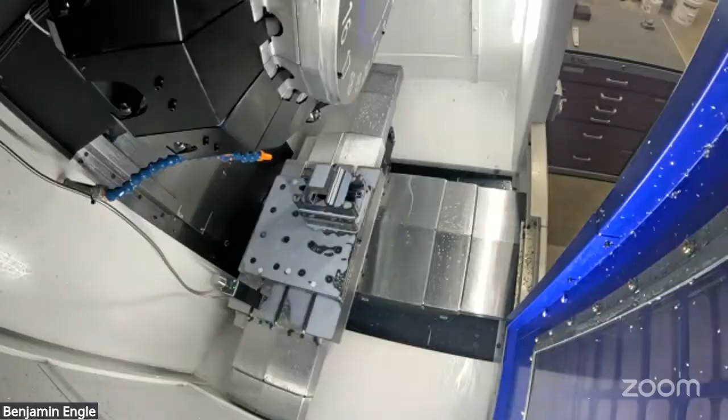Just a heads up, we might need people to turn off their webcams when we go to the live stream when we're showing the machining. Turn them off and then can they hide themselves? Switch to the guys, we're live on YouTube, but switch to the machining one. I just want to see what appears on YouTube versus Zoom. There's going to be a bit of a lag. And then I can highlight myself for everybody. Make sure you guys are all in gallery view.

The thing I'm trying to check now is what does the YouTube stream look like? Yeah, it worked fine. When you showed the machine, that was the only thing on the video on YouTube, and when you showed your screen, that was it. When I look at the webinar view, Ben, I don't see my screen at all, even though I'm screen sharing. I see your screen. That's interesting. So you see my screen, do you see Fusion?

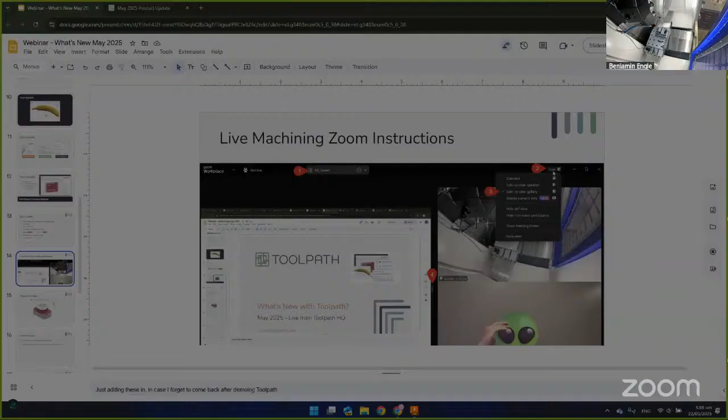It should look something like this. Yeah, I see that. You need to be in gallery mode. I am in gallery mode, and all I can see is everyone's video streams, not my screen share. You have to click number one. Make sure you're on my screen, not webinar. Okay, so I can only see a small machining video. This is just what I see, which isn't great. That's fine. That's better than nothing.

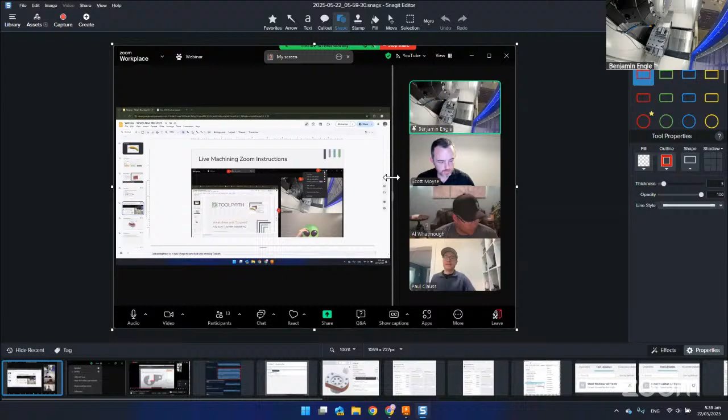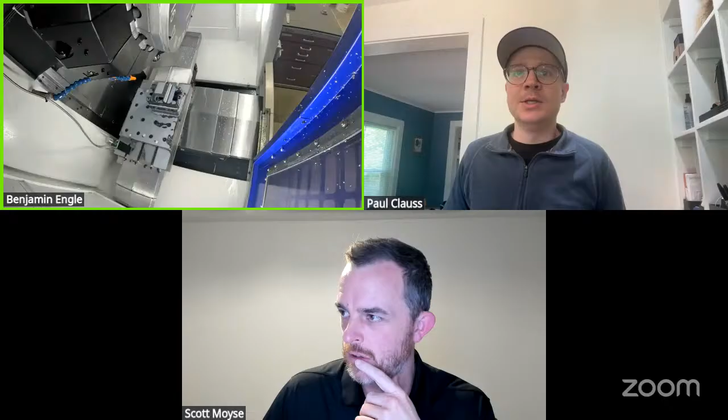It's because Paul and Al are on the call now with their videos. So if you guys kill your videos... Well, their faces are still there. You have to hide. They really just shouldn't be on the panel. Scott, stop sharing your screen for just a sec. Okay, so that shows me Ben's pinned video of the machine. If you share your screen again, I think it should take priority. Yeah, it goes to yours. But we were trying to get an even split either side of the divider between machining and the screen.

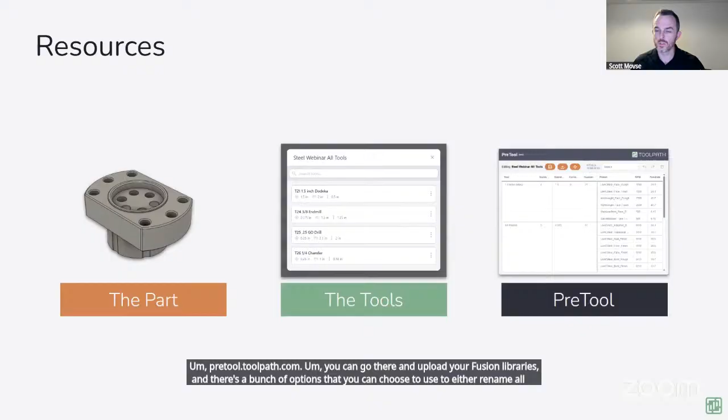Pretool.toolpath.com. You can go there and upload your Fusion libraries. There's a bunch of options that you can choose to use to either rename all of your tools to a consistent standard across the board. Even if you only do that, it's really handy. But where it gets really powerful is if you go through and add all of the Toolpath standard preset names, and again, optionally, you can add feeds and our suggested feeds and speeds to those presets.

It's an absolute joy when you start using Fusion with all of these presets configured. You just don't have to think about speeds and feeds anywhere near as much. Those kind of decisions just disappear, and it just becomes far less stressful programming in Fusion. Really powerful stuff, make sure you check it out. And again, there's some good learning content on our knowledge base to teach you how to use Pretool.

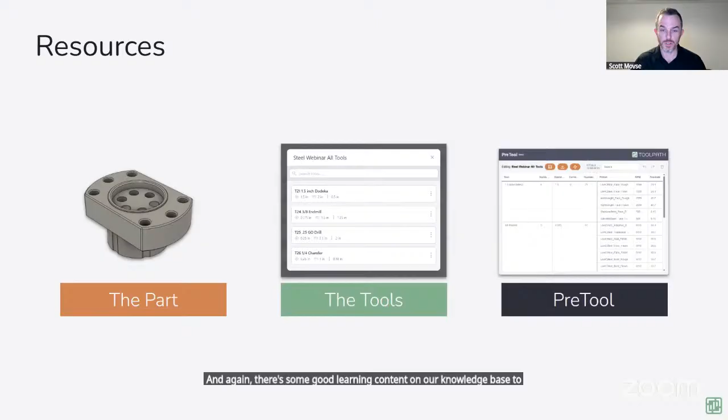So this is pretty cool. Today we've got Ben in our machine shop up in Bedford, Ohio, near Cleveland, and myself down here in Christchurch. So technology at its best. Fortunately, we've got some good fiber connections between the two continents, and here we are.

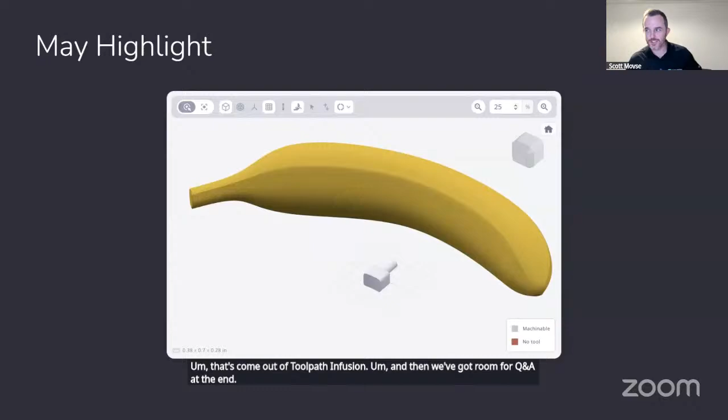All right, so the first highlight is Banana for Scale. This kind of speaks to how awesome our team is. I put a comment in Slack in sort of mid-March joking about including Banana for Scale, and one of the developers came back and said, sure, just give me a model. So I modeled this banana up using T-splines in Fusion, and the idea was for it to just be a one-hit wonder for April Fools, but it was very popular.

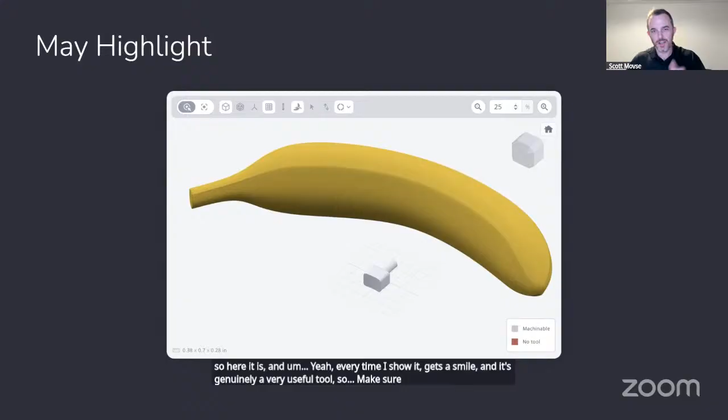Users asked us to put it in the product permanently, so here it is. And every time I show it, it gets a smile, and it's genuinely a very useful tool. So make sure, we've got a cute little banana icon up on the toolbar for you to turn it on and off.

The real highlight for me is our tool recommendation engine. This is an absolute game changer. The idea that you now don't have to rummage through tooling catalogs anywhere near as much as you needed to in the past is just absolutely incredible.

We've now got magic uploads as well. So when you upload a tool library to Toolpath, if the Toolpath cutting presets aren't on any of the tools, it'll add them by default. So when you then use that tool library in your cut config, it'll propagate all of the cutting roles automatically with those presets. It doesn't change any of your existing data, just adds more to it, mostly to create the right experience for new users.

Now, the most frequented area, I would imagine, is the overview tab in all of the part reports. So we've just organized everything on the right-hand side a bit more. We've now got tool recommendations in there as well, just a bit more data at the top in the overview section. And then all the machinability messaging has been improved, all the grouping there as well. And then you can click on each of those issues and get some deeper insights and learn about why that particular feature is not machinable at the moment.

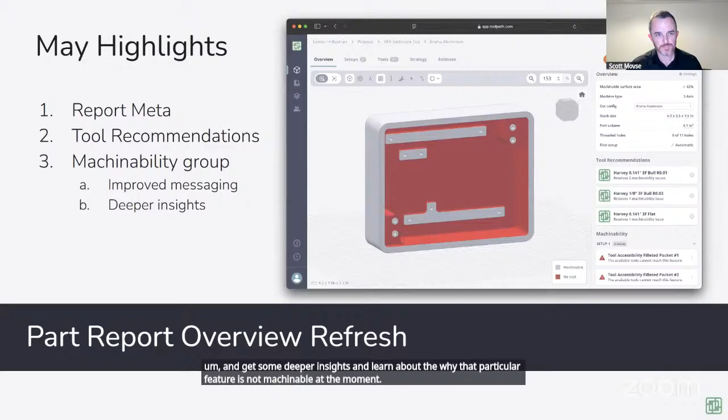Then we've got some quality of life updates. Tool compaction is now called tooling capacity. This used to be, I believe, in the user preferences, but now it's part of the cut config itself.

Now when you're editing a cut config or creating one, once you've saved it, you can set it as default right there in the canvas, instead of having to go back to the main cut configs list and choose which cut config you want to set as default.

In the cutting roles view of the cut config, we never used to show which presets weren't assigned yet. Now we've got a little unassigned tag that shows up, so if you miss one, you know, and you can drag it across into the cutting roles area.

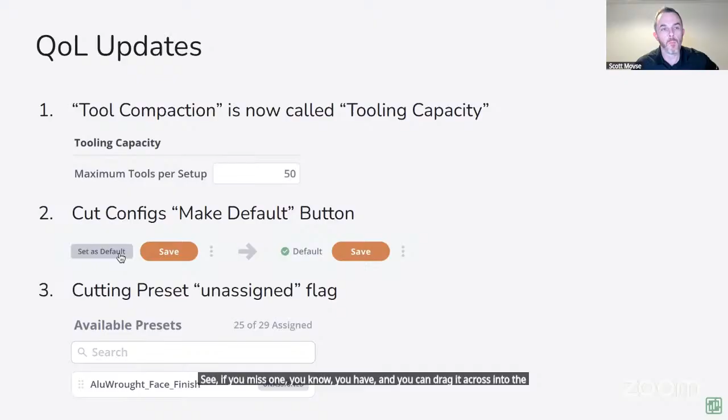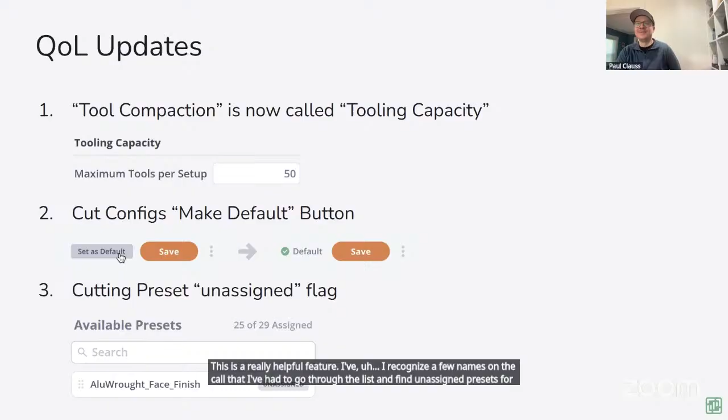This is a really helpful feature. I recognize a few names on the call that I've had to go through the list and find unassigned presets for before. So, nice.

All right, so today's demo. I'll just switch into Toolpath here. I've uploaded some parts already, but I'll grab one just so you can see the normal process. So, uploading that part, using the default cut config to generate.

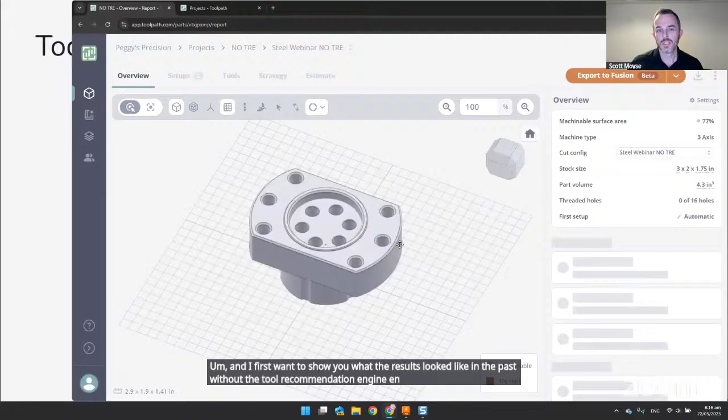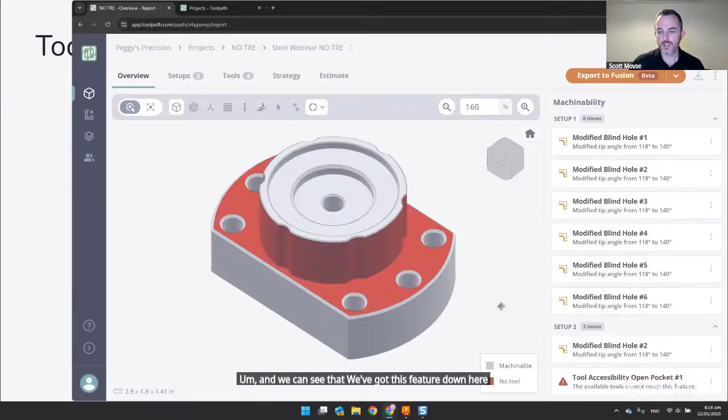I first want to show you what the results looked like in the past without the tool recommendation engine enabled. In the overview tab, we've got this part we're working on today, and it's 77% machinable on a 3-axis machine with a cut config that doesn't have tool recommendation engine enabled. We can see this feature down here, this open pocket, isn't machinable because there's no available tools to reach it.

So in the past, we'd have to inspect that, figure out what size tool we need, go find that tool, and make sure it's added to our library so this would then become 100%.

But if we go to our tool recommendation engine result, we can see we're now using a different cut config where it's enabled, and we've been recommended this quarter-inch Kennametal flat end mill, which is going to solve both finishing and roughing for Open Pocket 1.

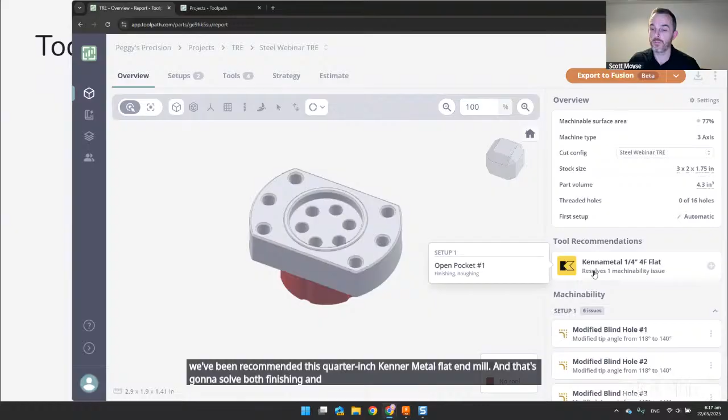We can click on this tool, click on that entry twice, and get displayed information about it. Now we include the product ID, and we've got a link out as well, so you can go to the Kennametal website or whichever vendor it's from and see information about the tool on their website, in their context.

Buy it if you like, and if you do want to move forward with using that tool, then you just click use this tool.

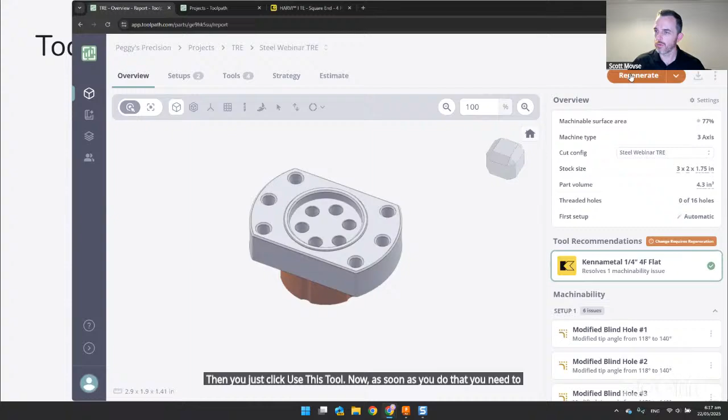Now, as soon as you do that, you need to regenerate. But before I click regenerate, I'm just going to go and have a look at the rest of this part and see what else might need to be done.

So we've got two setups here. In the setup tab, for each setup, we've got a summary of all the features on this part. In setup 1, we can see there's some holes. We've got a 1.4 inch hole, which is just the big bore at the top, and then the quarter-inch holes are all the ones around this PCD in the middle here.

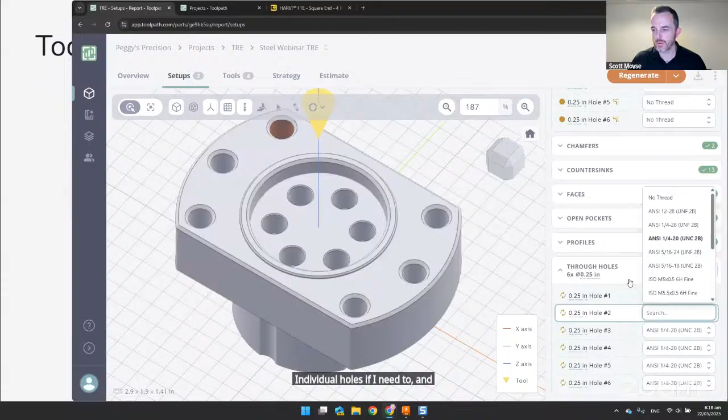And then down the bottom we've got another 6 holes. These ones around the outside are actually threaded, so I can come in here and choose my 1/4-20 thread, and when I do that, it will apply that to all the holes. I can optionally come in and deselect individual holes if I need to, and make them just through holes if that's what's required.

And once I've done that, even if I hadn't selected the recommended tool, I would again have to regenerate. So now I've done both of those things, I'm going to regenerate again. That's going to add this tool into the game, and then analyze what's required to manufacture those 6 holes.

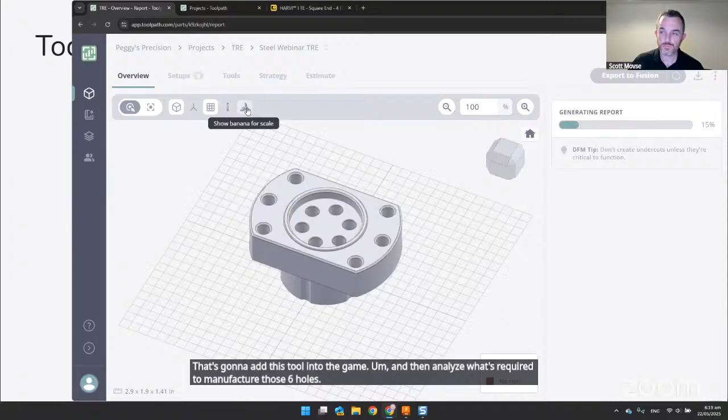So while I'm waiting for that to generate, I'll jump into the tool libraries here and show you that. Now we've got a selection of vendor libraries in here already - we've got some Kennametal, Harvey, and Haas, and then we've got generic Toolpath libraries. So pretty comprehensive libraries for hole making in here.

We're going to add more and more to this over time. Then if we have a look at the cut config, and go to the no tool recommendation cut config, we can see how we enable tool recommendations in Toolpath.

So we've got the new overview tab here, where we're starting to aggregate different assets from around Toolpath, and this will keep growing over time. We've got our general machining preferences in here, which set up the guardrails for how you want the AI to program your parts.

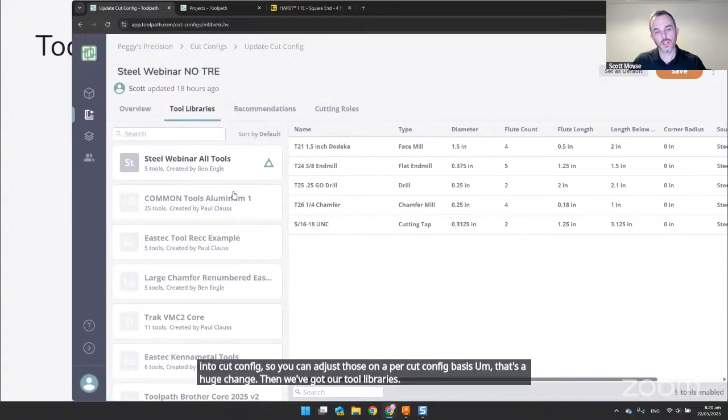Geometry deviations were in user preferences before. They've now been put into cut config, so you can adjust those on a per cut config basis - that's a huge change. Then we've got our tool libraries, which are typically the tool libraries for tools you have available in your shop.

Recommendations, this is more for the vendor libraries. This is where you would select the libraries for your tool recommendation engine and then cutting roles. In your tool libraries, you've got the option to set whether this particular library is preferred, standard, or backup. So that's super important, and you'll see why later on.

And currently we can see we've got 5 tools in our machine effectively. So these are the 5 standard tools we've always got in our machine.

If we go to our recommendations tab now, we can look at adding some of these vendor libraries. So we've got the 4 flute library from Kennametal, and we want to add some drills. So we can add in a stub and jobber drills library, and then also taps.

So what will happen now is when Toolpath plays the game with your part, it's going to prioritize using tools from this library, and if it can't find what it needs, then it's going to pull everything from here.

In the cutting roles tab, this is where you can see where all of the cutting presets from each individual tool is propagated, like as a group, automatically using the autofill presets button down here into all the individual cutting roles.

So if we get rid of alu face rough, we'll then see here that it's now unassigned, and we can drag that in and add it back if we want. So I'm not going to save that, but you would have to save it to make all those changes stick, and then regenerate your report, and it will then use the tool recommendation engine.

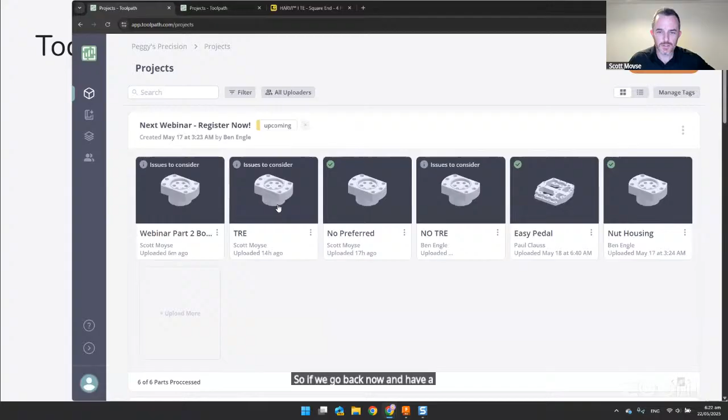So if we go back now and have a look at TRE, we can see it's now giving us a new recommendation. Now this is super cool - not only has it pulled through a tap, it's pulled through the matching drill to go with that tap.

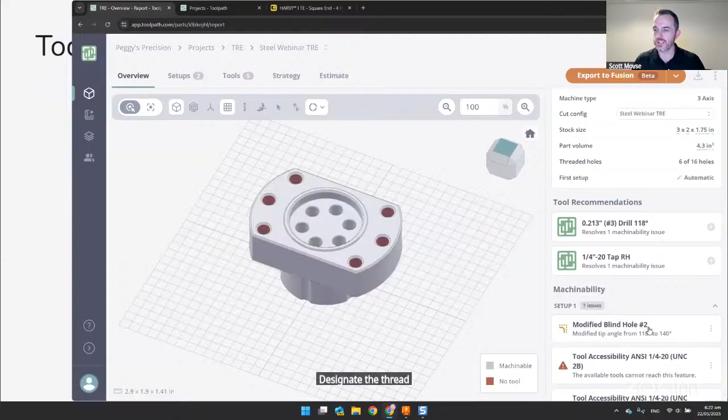So you don't have to spend time thinking about which drill's needed for that thread. You just designate the thread, Toolpath finds the tool that's needed and adds it in. So yeah, I want to accept both of those, and it's going to solve all of these tool accessibility issues for these holes here. So add both of those and regenerate.

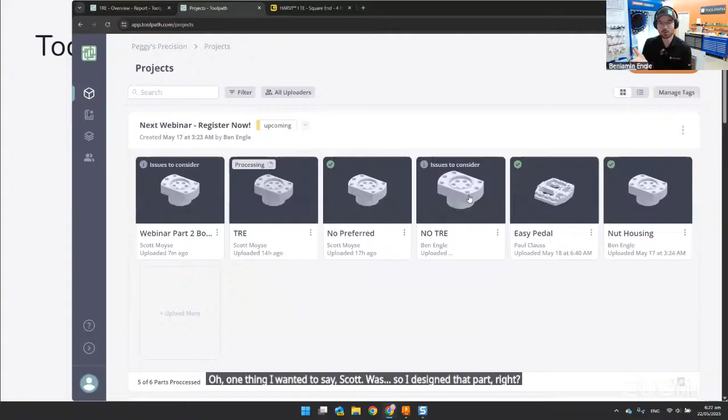Oh, one thing I wanted to say, Scott, was so I designed that part, right? And those have 1/4-inch holes. I'm just a bad designer. And you threw some 1/4-inch, like quarter 20, which I'm surprised you didn't use metric.

It really surprised me. But what it's doing is it's ignoring the actual geometry, and you're saying, hey, I'm overriding this - Toolpath, I want to make these quarter 20 holes. So you need to be smart enough to use the drill size. That's pretty slick. I think it's nice that you can override that.

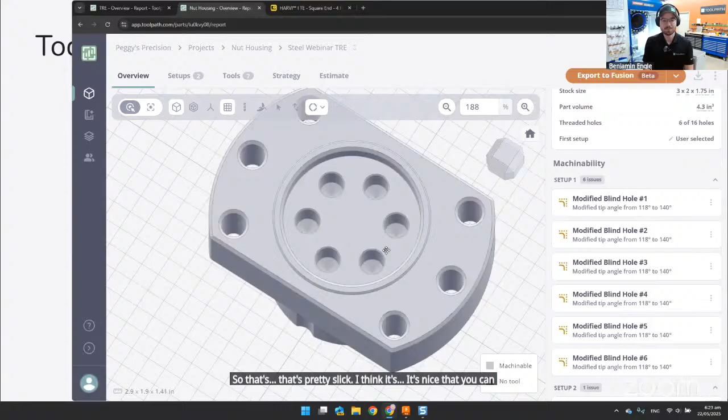That's right. So if we have a look at the tools tab here, we can see that our library had a 1/4-inch drill, but obviously it can't use a 1/4-inch drill on a 1/4-inch hole if we're going to put a 1/4-inch thread through it. So that's why we've now got this number 3 drill added into the list. All right, back to the overview tab here.

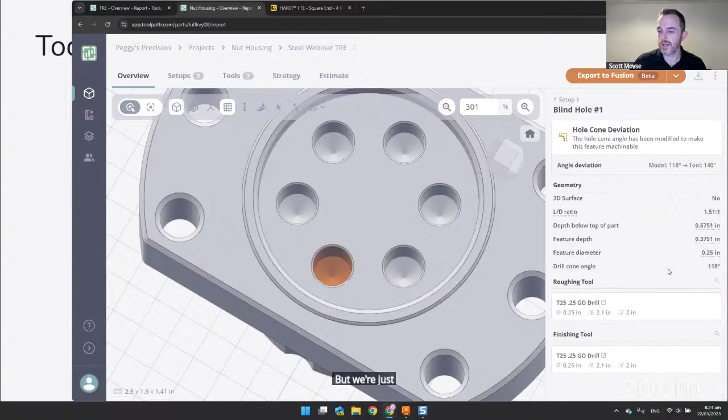I just want to point out there's still some machinability notifications here. Not so much issues, but a notification that something has been changed. We've made some assumptions here. So we've got hole cone deviation. So it's modeled at 118 degrees, but our Go drill has got a 140-degree tip angle on it, which is fine. So we can still drill that hole, but we're just letting you know that change has been made. So if we go back to setup 1, we can see that there's a number of those modifications across 2 setups.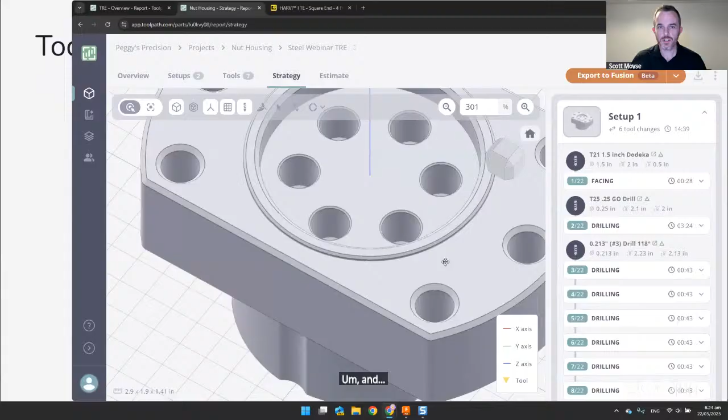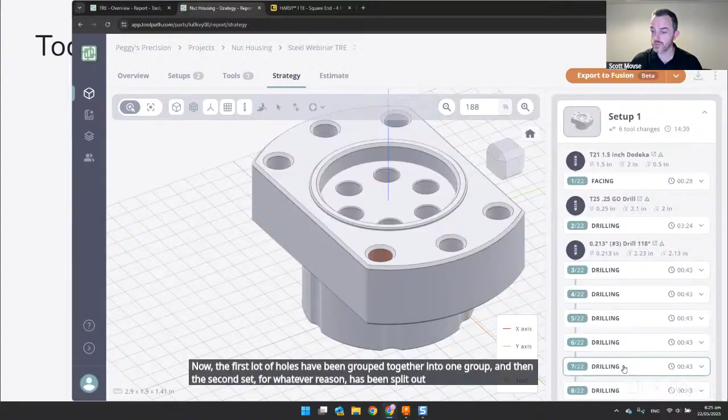All right, so if we go to our tool list, we can see that we've now got our 7 tools in here. And strategy, we can review this. So we've got setup 1 and setup 2 down the bottom. So we've got 12 operations in setup 2 and 22 in setup 1. Now the first lot of holes have been grouped together into one group, and then the second set, for whatever reason, has been split out into 6 individual drilling operations, and then we've got 6 individual tapping operations. Yeah, that's something for us to improve, but it's done the job.

We've got the chamfering split into 2 separate groups, and we'll explore why that is when we look at this in Fusion later on. So you can expand out all of these and see all the speeds and feeds that have been used as part of the preset on that particular operation. Then, of course, we've got the estimate tab. But I'm going to go ahead and export out to Fusion. I didn't actually need to do that. And go import program, put in my key.

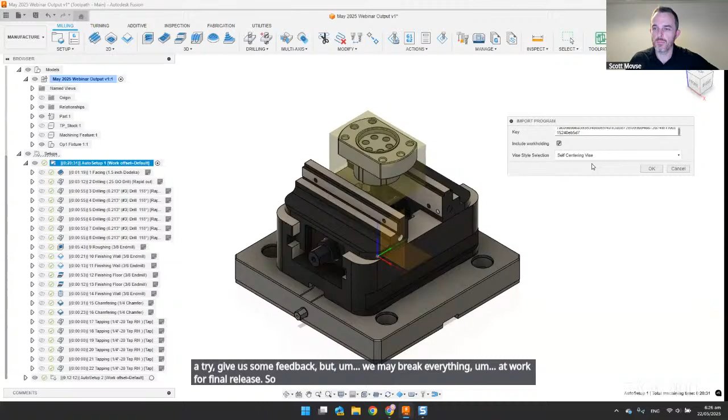Now we've got this include work holding checkbox. If anyone's interested in trying this, I've been asked, we're happy to tell you how to turn it on, but it is kind of alpha. So we haven't fully defined how we're going to build out all of this work holding yet. So you're more than welcome to give it a try, give us some feedback, but we may break everything for final release. So here I want to use self-centering vice and click OK, and everything will load up.

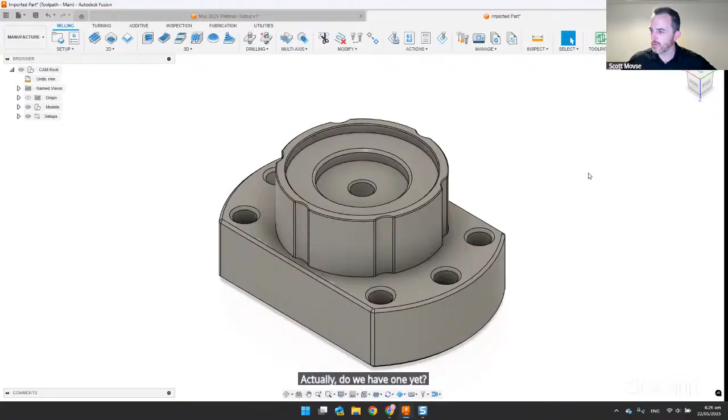So it's going to go and pull out the work holding from our team hub. You can then replace that vice with your own. We've got tutorials to show how to do that. Actually, do we have one yet? Or are we going to create one, Paul? We have some stuff, and I'll create one. I asked people in the chat, if you want to try out work holding, shoot the support email, and I'll create a video and get people set up.

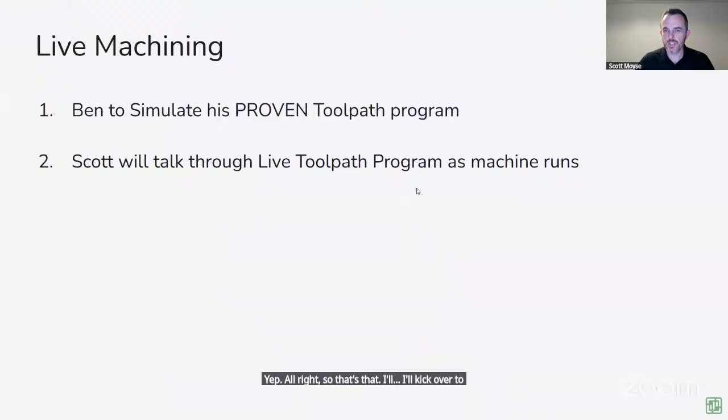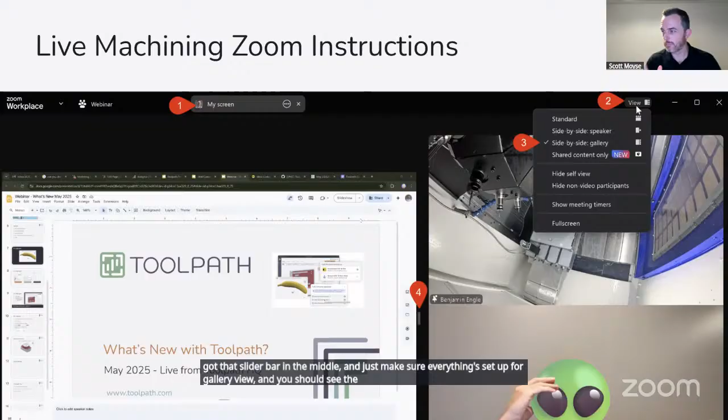Right, so that's that. I'll kick over to Ben now, and he's going to show you what he's running on the machine and get the machine running. But yeah, just as a reminder, you've got that slider bar in the middle, and just make sure everything's set up for gallery view, and you should see the machining and Ben's screen at the same time. Cool. Thanks, Scott. That was excellent, by the way. I'm going to share my screen.

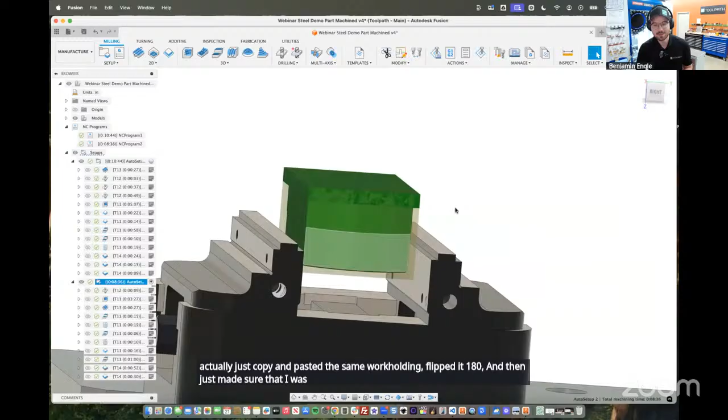So I've got the same part. We've already machined it right here. And Scott's going to go over some of the things that we ran into when we pulled in for the cam automation. But overall, it did an excellent job. So I'm going to show you, this is setup 1. Toolpath pulled this in all automatically, but for setup 2, I actually just copy and pasted the same work holding, flipped it 180, and then just made sure that I was holding it between parallels. So I've got a little bit of work into the second setup, but we just want to be completely honest with you guys and show you that it's not just press go on the machine.

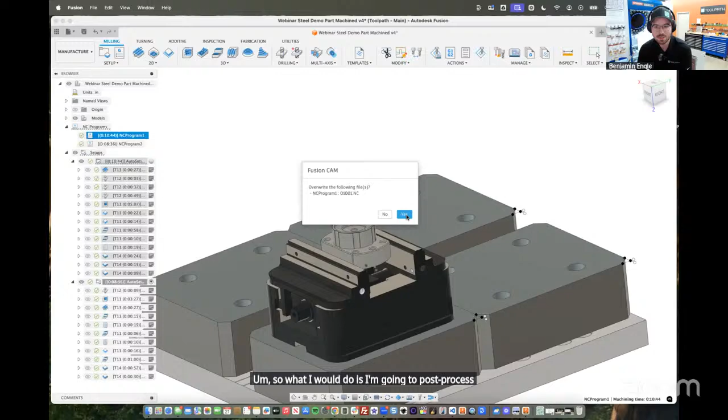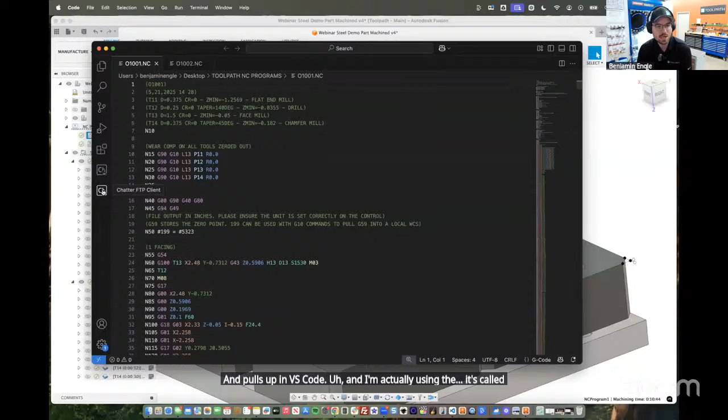So what I would do is I'm going to post-process this op1, and it pulls up in VS Code. And I'm actually using what's called the Chatter FTP client. So if I open this up, I can see my program number there, and it's being sent out to the Brother Speedio. I'm going to overwrite it, and the FTP transfer has happened. So now it's gone straight to the Brother. So what I'm going to do now, I'm going to kill my share.

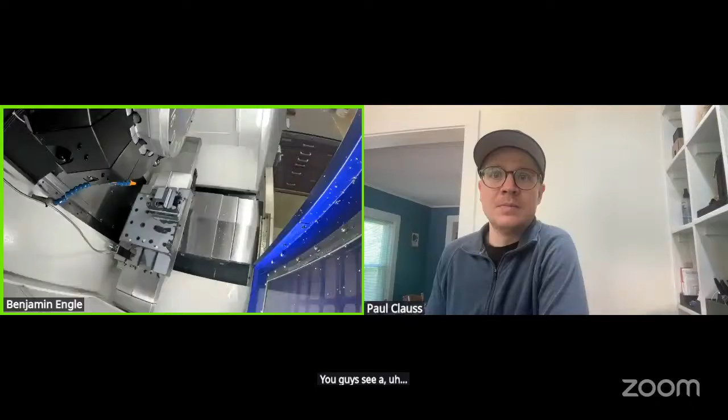Just bear with me while I set this up. You guys see a Brother. Let's see here, spotlight for everybody. And we'll do, okay, cool. All right, so I've got my stock set up. Can everybody see me? Good, right? I can see you and hear you.

Okay, awesome. So we're making this out of 1018 steel. And so I have my stock set up for my op1. I'm using a hard stop, so I've already probed it in, so I don't have to worry about that. And we'll rock and roll and press cycle start. I have it pulled up here.

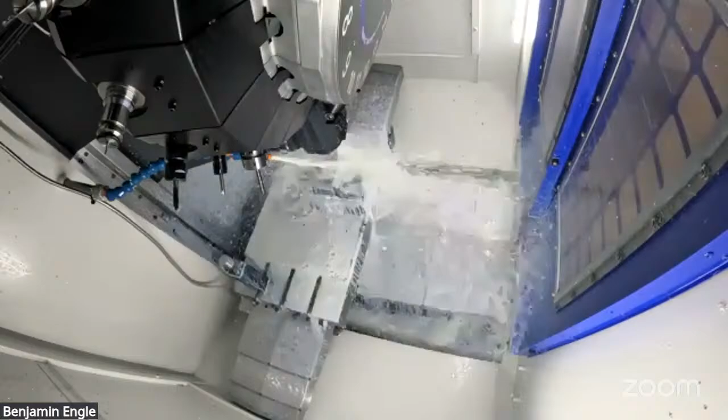And while that runs, Scott's also going to talk about some of the things that we changed in Fusion, and hopefully you guys can watch the machining happen, and we'll work on getting the entire part made here during this webinar. Okay.

All right, so I'll start sharing my screen again. Have a look at what we've got here in Fusion. Just make sure we can, yeah, perfect. Sorry, just getting myself set up here. All right, so just a reminder, you can grab the little divider in the middle and switch between making the live machining and the screen share larger or smaller.

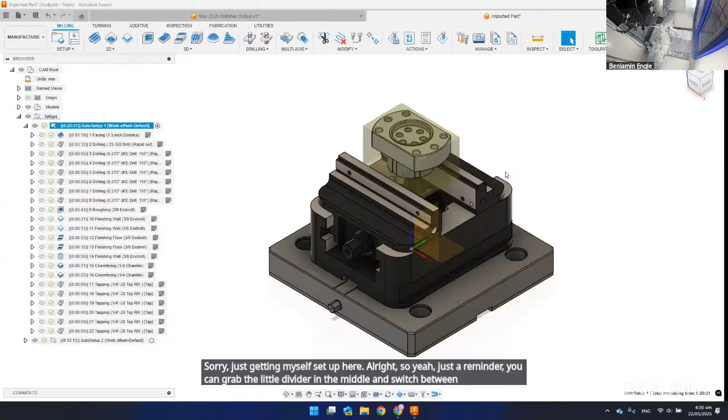So we've got a pretty good result here. We've got setup 1, setup 2, and all the toolpaths have mapped up. Just want to point out that they're all numbered. So if you ever want to troubleshoot something or understand which toolpath relates to what, when you go back to the program under strategy, you can see all the numbers here. So 3 of 22, this is the corresponding toolpath.

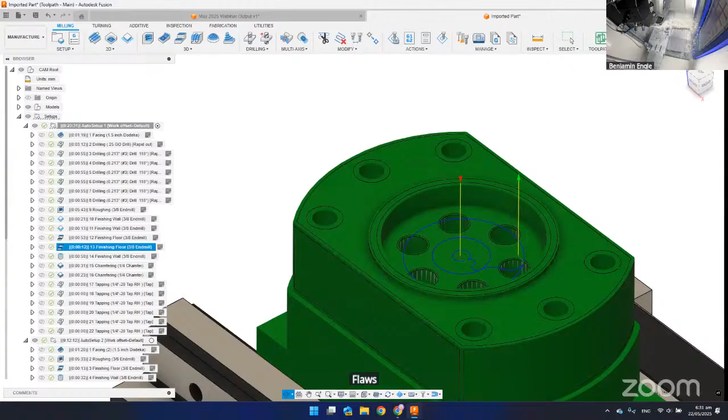So we're facing off, that all looks good. And we've got our grouped holes, they look fine as well. Individual holes around the side, that looks great. Then we've got our roughing, nothing wrong with that at all. We could tighten down that helical ramp if we wanted to a bit. Finishing the wall, finishing this little open pocket wall, floors, both on the top and inside the counterbore there. Finishing the wall inside the counterbore. And then we've got two chamfering operations.

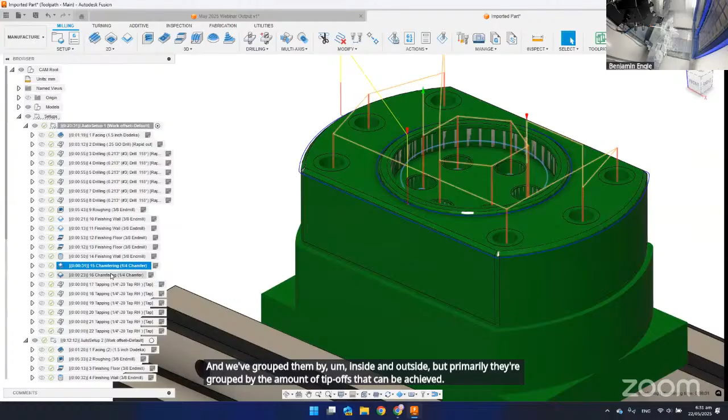Now this is a pretty neat feature, and we've grouped them by inside and outside, but primarily they're grouped by the amount of tip offset that can be achieved. So typically, if you were to program all of these edges manually, you'd generally end up picking one tip offset that works across the board. But Toolpath has gone through and analyzed what the maximum tip offset can be for any given feature.

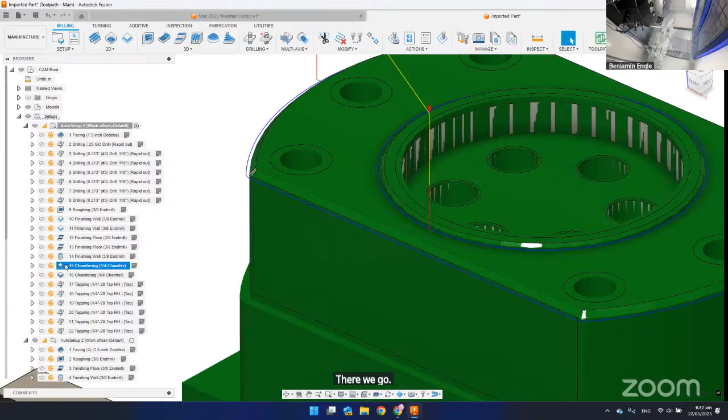And we've got, well, I should change to freedom units here, just a second. There we go. Now everything needs to be regenerated. I'll just kick off that now. It shouldn't really invalidate generation, but anyway.

So the first chamfering operation, we've got, what's that? 5,000. And 72,000. Am I talking the right language there, Ben? So we've got a longer tip offset for the second set of chamfering passes because it can. So that's pretty nice. And automation coming into play. There's all of our tapping all sorted out for us. So setup 1 doesn't need any changes at all.

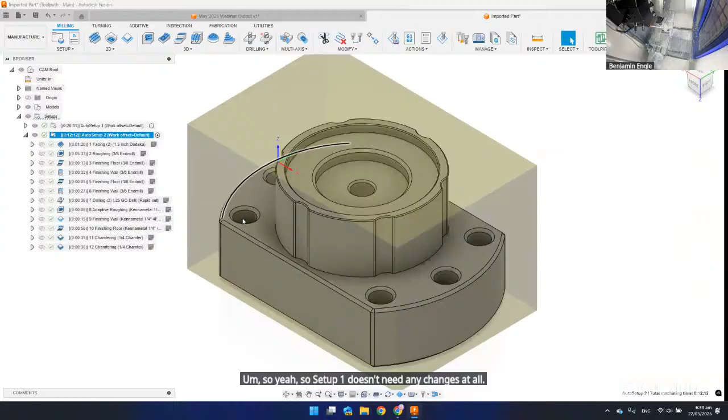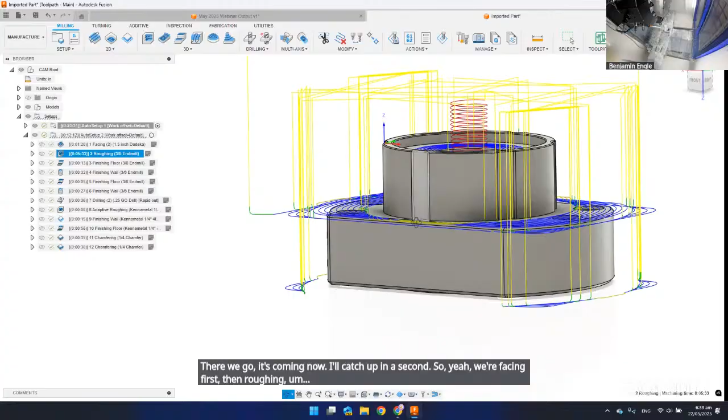So we're facing first, then roughing. Looks like we've got some air cuts happening here with the roughing, so we'll take care of that. Finishing the floor, so all the finishing stuff's all good. Then we've got drilling. Now, when we look at this, we're drilling down the center of the part. Having a hole there before the roughing would help, so probably a good idea to move that drilling up to before the roughing. I'm pretty sure that's what Ben's done,

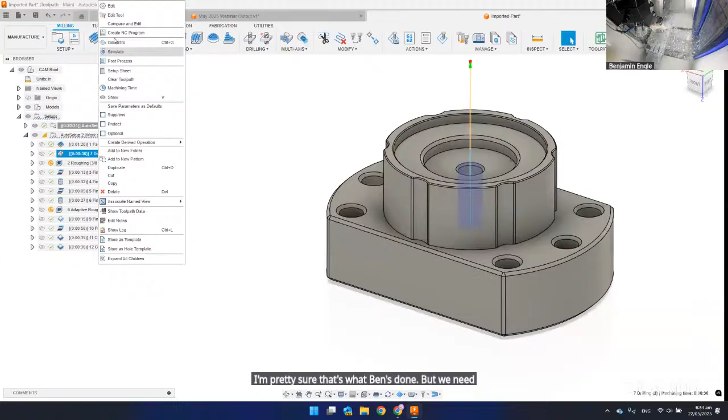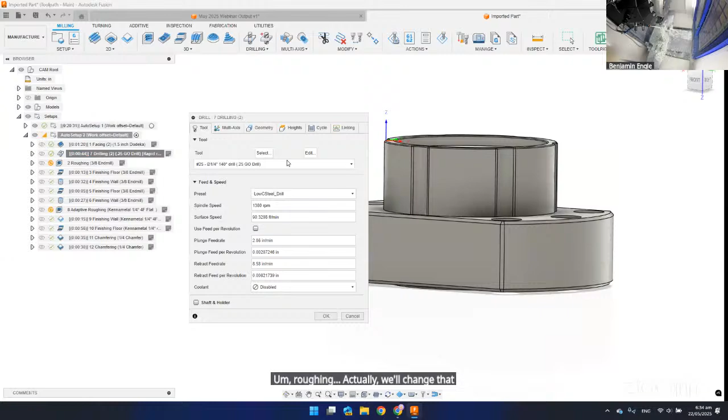but we need to start the drilling further up on the part. So when that was programmed, it assumed the stock had been cleared, so we just need to change our top to model top. Just get rid of that offset there. So we've already decked the top. Roughing. Actually, we'll change that to stock top. So stock top.

So facing, is there a finish? There's no finish facing in here. So we'll move the facing down to after the roughing. So we're drilling, generate the roughing. Then we're facing, we end up finishing that. So we've got some excessive passes there, so we'll want to edit that. I'm just going to catch up, and we'll turn off multiple depths because we only need a single finish pass. And we'll change our preset from face rough to face finish.

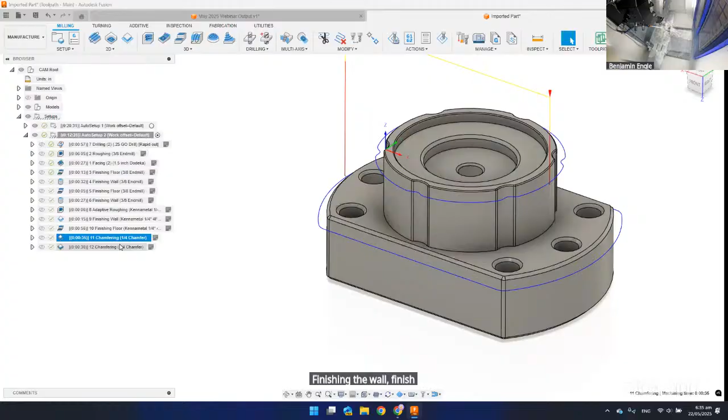And we're finishing the floor, the walls. We've got our adaptive roughing that needs regenerating. It will just come in and clear out the last bit of material in here. Finishing the wall, finishing the floor. Then again, we've got 2 different sets of chamfering for inner and outer and different tip offsets again.

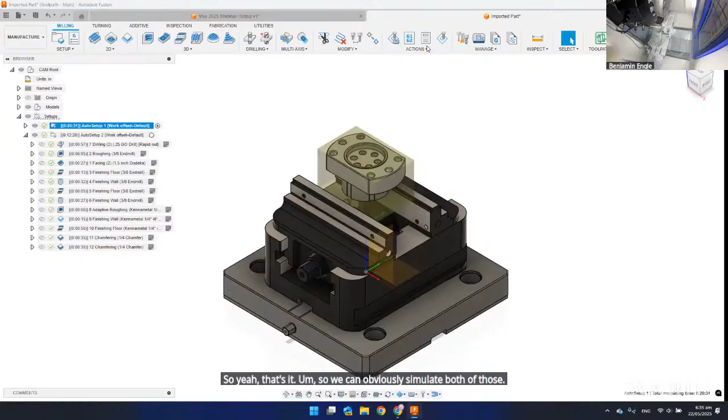So here we've got, yeah, 72,000. And same, okay. So they're both the same in that case. So yeah, that's it. So we can obviously simulate both of those. Turn on our stock. Make sure everything runs fine.

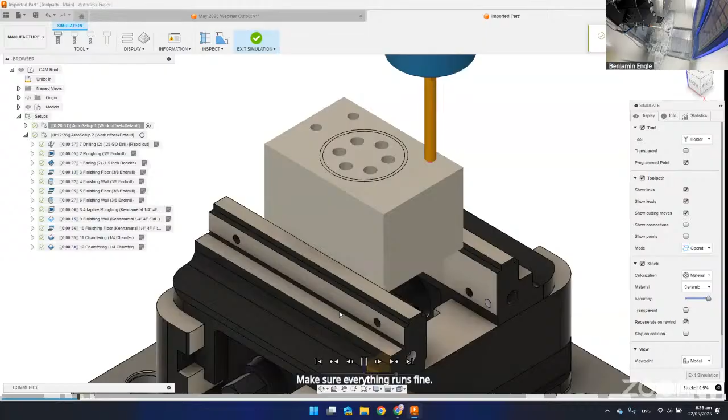Oh, just remembered I didn't take care of the air cuts on the roughing operation for the second setup, so I'll do that now. So we can see all this stock's being cleared here underneath what ends up being the top hat on the second setup. So we'll go back to that.

And all we need to do to tidy this up is, in the geometry tab, turn on reduce air cutting. There you go. So those passes down the bottom are gone now. And that's it.

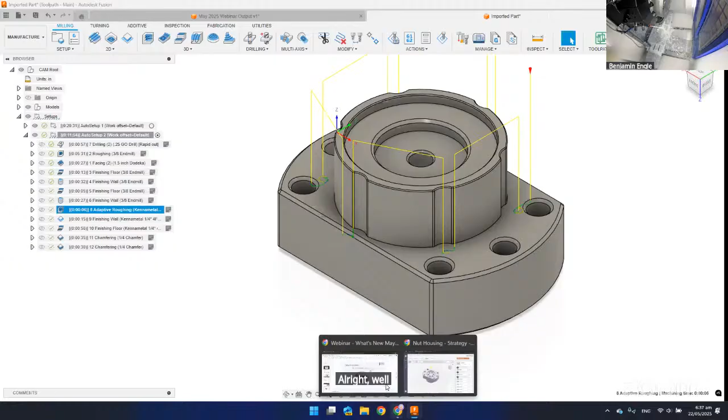So where are we at with the part, Ben? I think we just have one more operation to do, which are the chamfers. So then we'll flip it over and do op 2. Oh, all right. Well, you just interrupt when you need to flip it over. Okay. In the meantime, I'll just talk about some tips.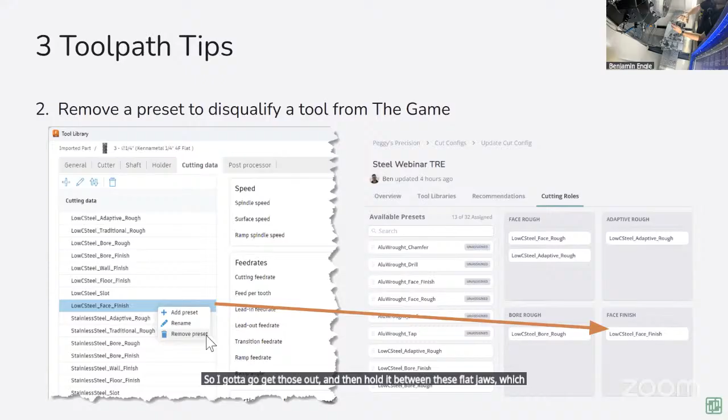All right, Scott, I'm going to interrupt. Yep. You guys can still see my feed in the machine. Here's the part. This is op 1, just how we saw it in the toolpath. That looks great. And what I'm going to do is flip it upside down, put it on parallels. So I got to go get those out and then hold it between these flat jaws, which is why I designed this nice flat here. And then bump it up against the hard stop and we'll run op 2.

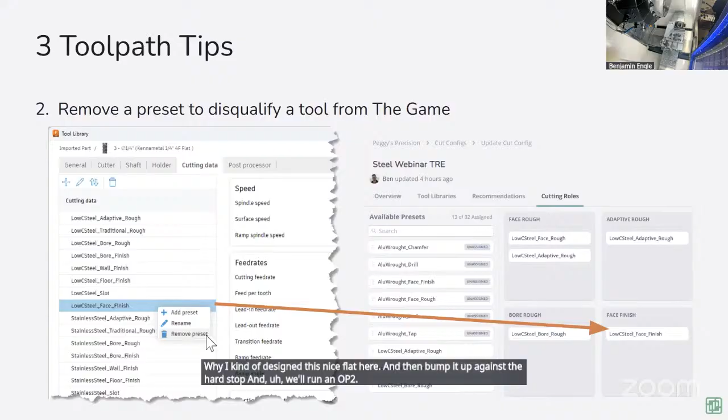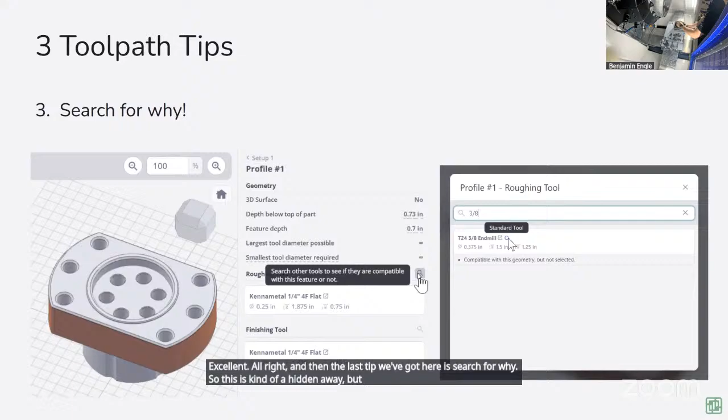Excellent. All right, and then the last tip we've got here is search for why. So this is kind of hidden away, but super handy. So I'll just jump back into the product to show you how to use that. So we were on profile 1. Yeah, okay. So if we have a look at setups here, actually, you know what? Let's go to tools. We can see that profile 1 roughing tool.

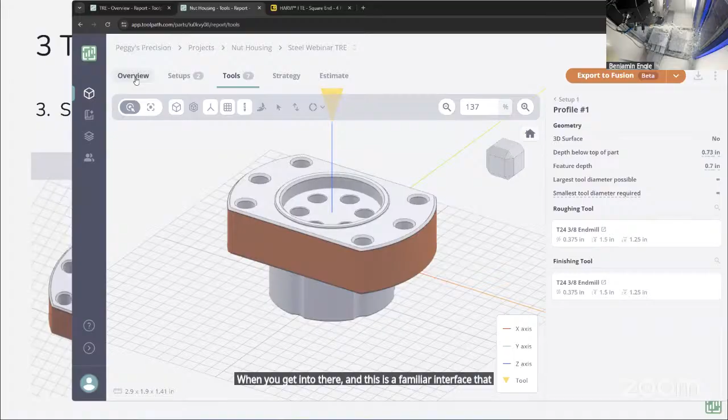Profile. So when we click in the white space on the individual features, it will highlight the feature in the graphics area. But if you click on the text, it will then take you into the metadata and all the information about that individual feature. When you get in there, and this is a familiar interface that you'll see appear in a number of different places. So same deal here. We can have a look at the profiles, click on the profile, we end up in the same spot.

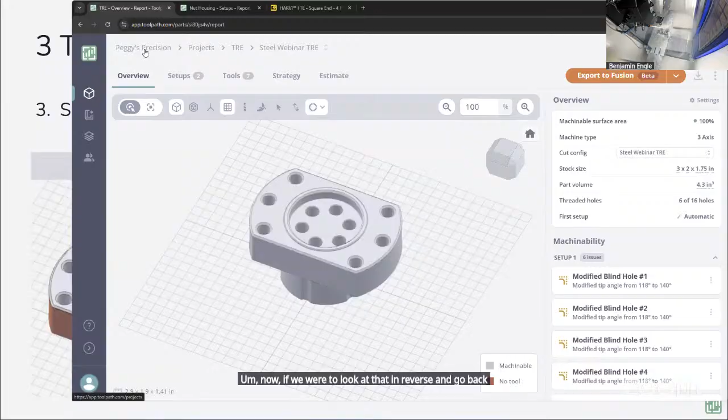So individually for roughing and finishing, you can click on this little search bar here, and we can say, well, I want to have a look at the 3/8. And we can see that it's compatible with this geometry, but not selected. Now, if we were to look at that in reverse and go back to, let's have a look at the... Why do you think it's not selected, Scott? So yeah, that's what I was.

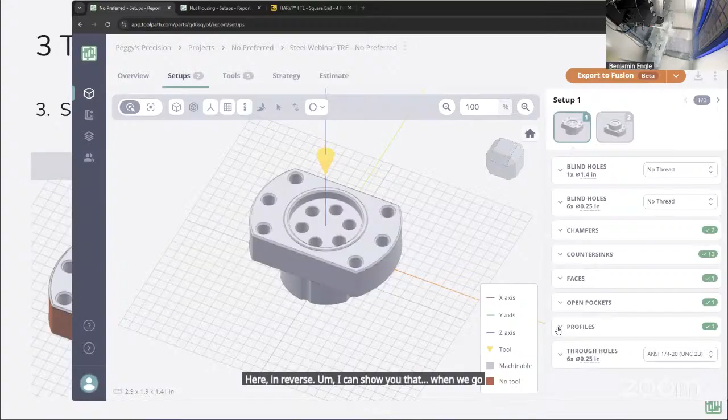So with the no preferred here in reverse, I can show you that when we go to the profiles, profile 1, it's selected the 1/4 inch 4 flute flat, but let's have a look at the 3/8. We can see that it's compatible with this geometry, but not selected. And the reason why it's not been selected is because it's a standard tool rather than the preferred tool when we compare it to the 1/4 inch. So that's one example of what it might be. But what are you going to add there, Paul?

That was a good example. I didn't realize you were going to go into the prioritization there. For tools with the same prioritization, it'll select based on material removal rate. Cool. Awesome. Thanks for that.

All right. So at the beginning we talked about productivity gains. So what kind of productivity gains have we shown you today? We've started to reduce the dependency on tooling catalogs with the tool recommendation engine. One thing I didn't mention is if you do have a vendor library of your own, you can upload that yourself and set that as a recommended library. So there's nothing stopping you from doing that.

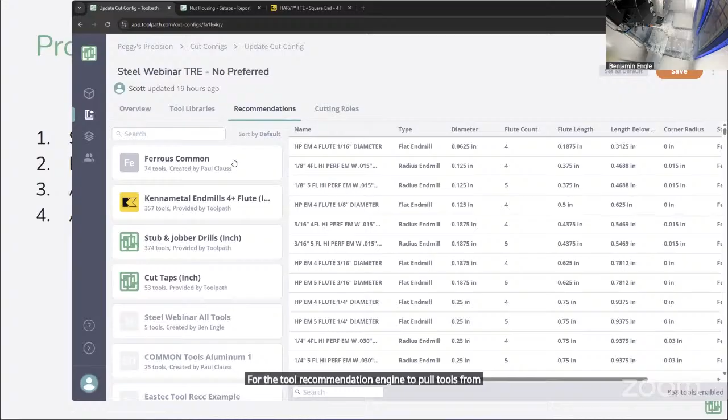So if we go into here, we could find, say, maybe this Ferrous Common is a library that you want to have available for the tool recommendation engine to pull tools from. So all you need to do is select it. It pops up to the top of the list. That means if you were to go and try and add that in your tool libraries tab, you wouldn't be able to because it's being used in the recommendation section.

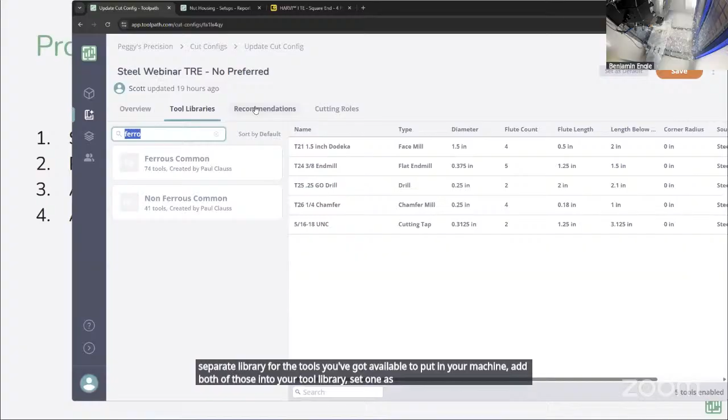Prioritizing the use of tools in your machine. So if you define a library just for the primary tools that you always have in your machine, and then a separate library for the tools you've got available to put in your machine, add both of those into your tool library. Set one as preferred. So we'll use this one as an example. We'd set this one, the tools in our machine, as preferred, and then Non-Ferrous Common as our standard one. Then the game will be played between those two libraries. So these are all tools available in your shop. These are in your machine. These ones aren't in your machine.

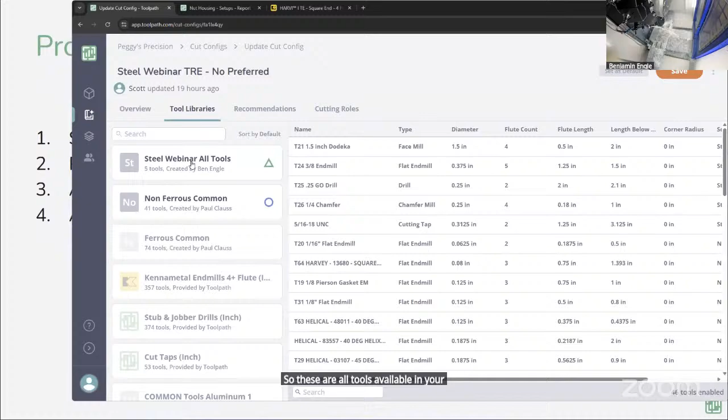Automating drill selection for tapped holes. Sure, there are templates that you can set up in CAM, but that requires you to actually go through and set all that stuff up, build that knowledge out yourself. That's all taken care of in Toolpath. All you do is specify the thread that you want to have cut, and it will pick the appropriate drill to match up with that tapped hole. If there isn't a drill available, correct me if I'm wrong, guys, but I'm pretty sure that we go through and bore mill that hole out so that you've still got the correct size there to then run the tap through.

And then automating CAM toolpaths. As you saw, I had to spend a lot less time selecting geometry there. There were some refinements that I could still do. All of my speeds and feeds were taken care of. I didn't have to worry about those. Obviously, in reality, there's going to be some cases where you want to finesse those. Ben certainly did to run this program here as well. He realized that in some areas he could speed the program up, which was great for this webinar.

And then automating optimal height variations for 2D chamfers. So varying where it's cutting on the tool and also making the most of surface speed on the tool where possible. And then we've started to automate work holding inclusion as well. So yeah, that's it. Hopefully you guys learned a few things today. And I'll just open things up for Q&A.

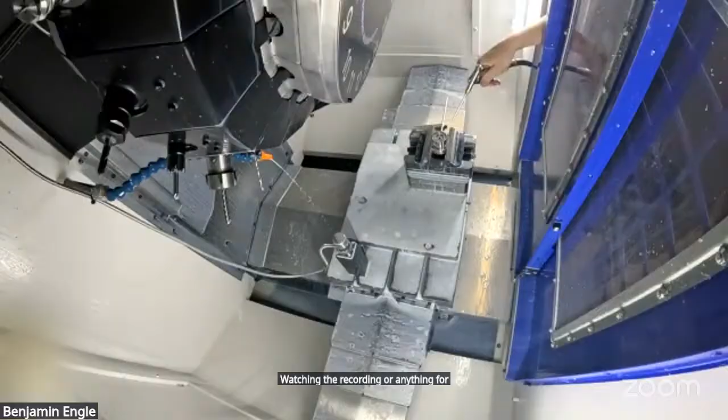There was one point of discussion in the chat that Paul clarified on, but for those watching the recording, for the tool recommendations, we bake in those libraries, like your generic drills and taps, and those vendors you mentioned, but you can actually upload your own vendor libraries if you have something you got from a catalog or downloaded off Fusion. So we don't block it to only the ones we have. We're going to add more, but we make it completely agnostic. So you can add whatever you want there.

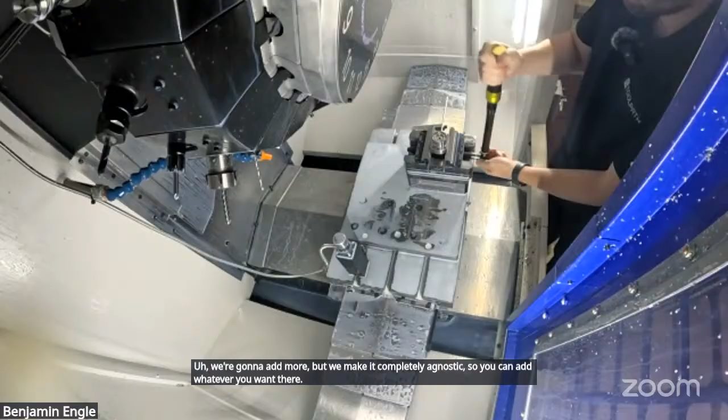Nice. Ken asked about a general tolerance threshold. I think the answer there is no at the moment, but you may have some different information there, Pete. Is there a global tolerance threshold that can be set anywhere so it can find a drill within that range if the model isn't great? Paul can probably speak to that one pretty well.

Yeah, so right now I don't think that deviation limits apply to hole diameter. It'll look for exact drill size. So when I work with folks, the recommendation is always model the minor hole diameter or pre-drill, I guess.

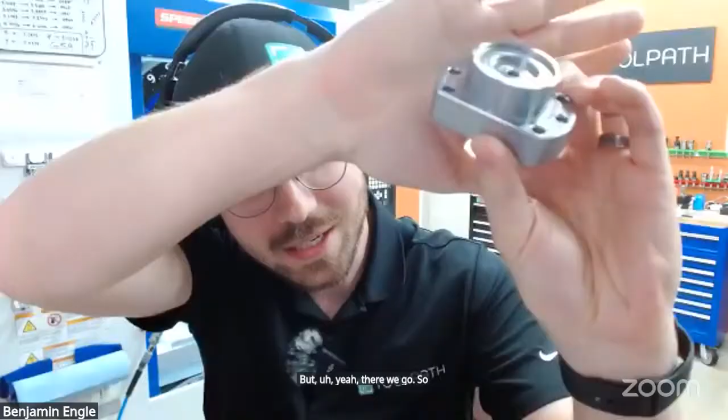Okay. All right, I've got a part in here. It's done. Came out really good. Very happy with that. Tim's on the call. He'd be happy that all of the edges are deburred and chamfered. So we made a 1018 part on the webinar using Toolpath CAM Automation, and Scott showed you some of the things that we had to change, but a lot of that was preference. So pretty exciting where we're headed with all this.